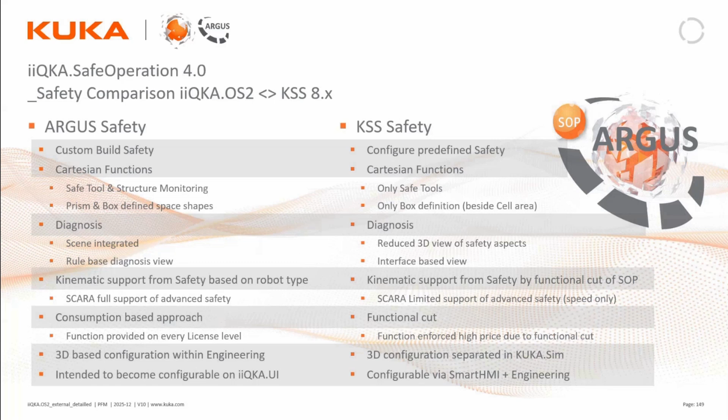For instance, a cell safety zone, your fencing, costs 10 points. Cartesian spaces cost 3 points each, and safe tools are 2 points per tool. This allows you to build a safety configuration that matches your exact requirements. While this may seem complex at first, iiQWorks simplifies the process completely. It automatically calculates and manages point allocation for you.

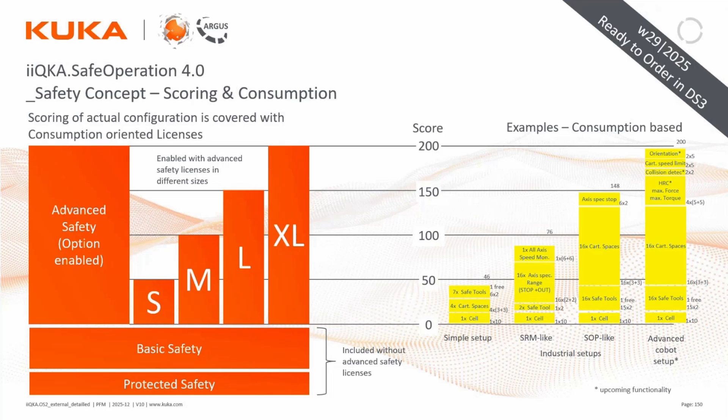As mentioned earlier, this unified safety system spans our entire robot portfolio. From compact SCARA robots to collaborative systems, all the way up to our largest Titan robots. The same tools and principles apply across all configurations, ensuring consistency and scalability for any application.

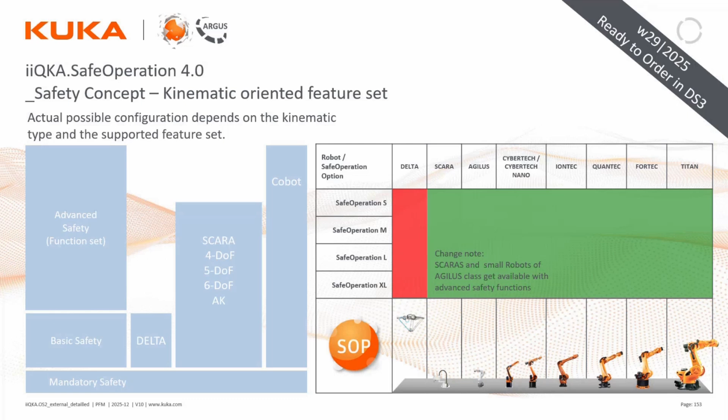The feature set continues to evolve with each iiQKA.OS2 release. We've already introduced versions 9.0, 9.1, and 9.2, with 9.3 scheduled for release this summer. Each release brings significant new functionality, along with improvements in performance, stability, and usability.

At the current level, you already have access to most functionalities familiar from SafeOperation. This includes Cartesian workspaces, cell boundary prisms, velocity limits, and operation monitoring. Future releases will further expand capabilities, particularly in collaborative robotics.

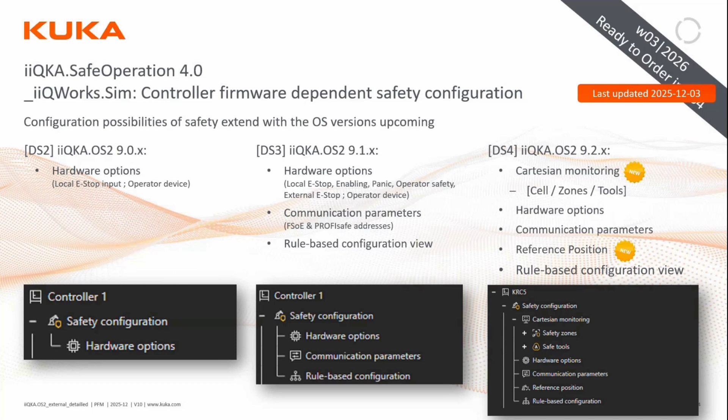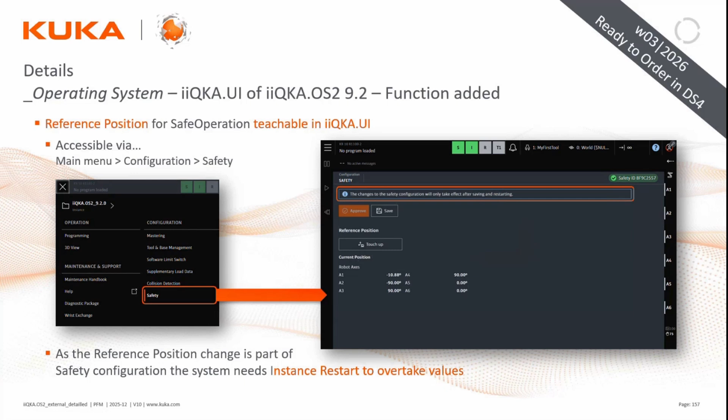Let's look at some of the new capabilities in iiQWorks.Sim. This example shows how to configure a cell wall. Previously, in SafeOperation, this required manually entering coordinates, which could be time-consuming and error-prone. Now, you can define safety zones graphically using drag and drop. You still have the option to enter coordinates manually, but most users prefer the visual approach.

Another major improvement is geometry flexibility. Previously, only convex polygons were supported. Now, concave shapes are fully supported, so you can define more complex layouts, like L-shaped areas, directly. This eliminates the need for workarounds using multiple Cartesian boxes.

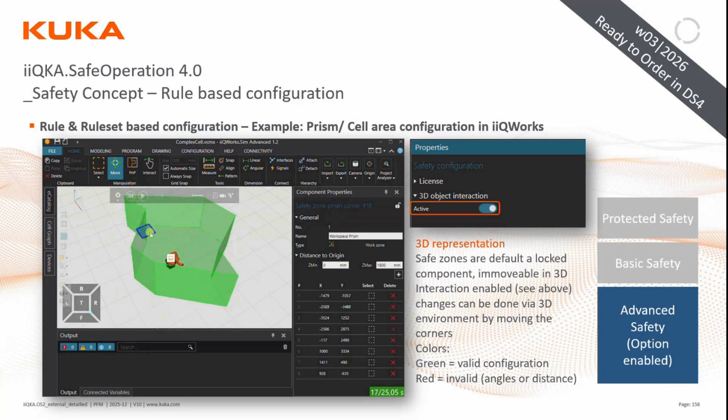Safety configuration is now fully rule-based. In SafeOperation, configurations were relatively predefined. With Argus, you can combine multiple elements into flexible safety rules. For example, you can configure logical relationships, like AND conditions, where multiple criteria must be satisfied.

Common elements include cell area or fence zones, work zones or protected zones, and velocity monitoring. And in future releases, you'll see expanded features such as orientation monitoring and advanced HRC functions like force limiting.

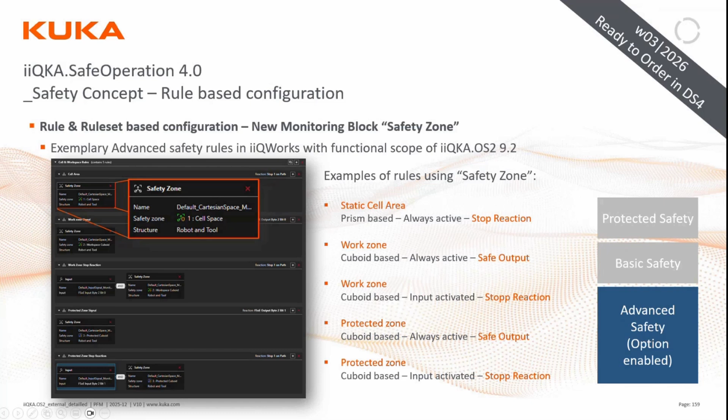As you build your safety configuration, the Project Analyzer assists you in real time. It automatically determines the appropriate license size: small, medium, large, or extra large. It also tracks your point usage as you add safety elements, ensuring full transparency.

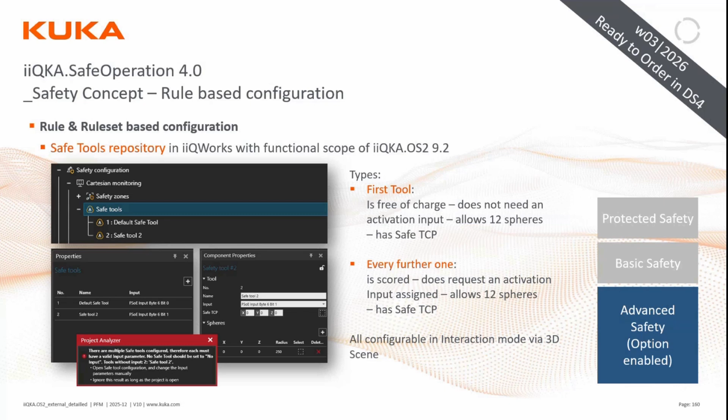For end effector protection, Argus continues to use a sphere-based modeling approach. However, configuration is now fully graphical within the Sim environment. You can easily add, position, and adjust spheres to accurately define your tool's protected volume. This allows for more precise and efficient safety modeling.

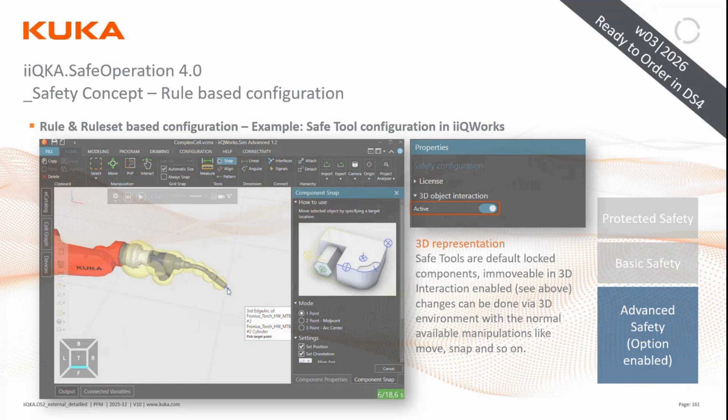There are also significant increases in system limits. Cell area prisms can now have up to 20 points, non-convex shapes are supported, up to 16 Cartesian boxes are available, and up to 50 safe tools can be defined. Each tool can include up to 12 spheres, enabling highly detailed protection of complex end effectors.

Another important enhancement is full arm monitoring. The system now also monitors the robot's rear kinematics, so areas like the elbow are protected as well.

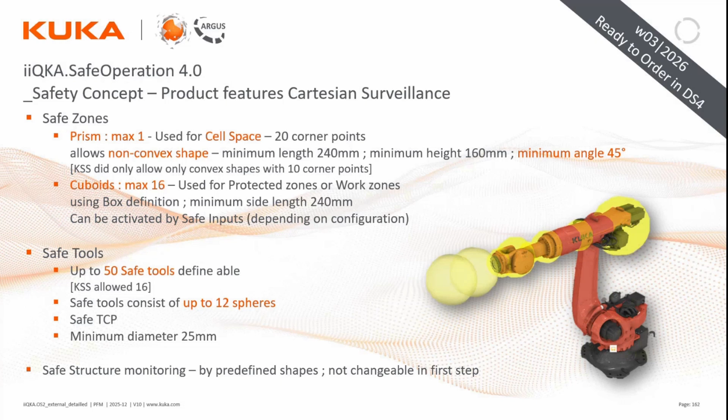Safety rules can be configured in detail for each application. For every rule, you can define the stop behavior. A key enhancement is axis-specific safe operational stops. This is particularly useful for positioners or applications where certain robot axes are allowed to continue moving under safe conditions.

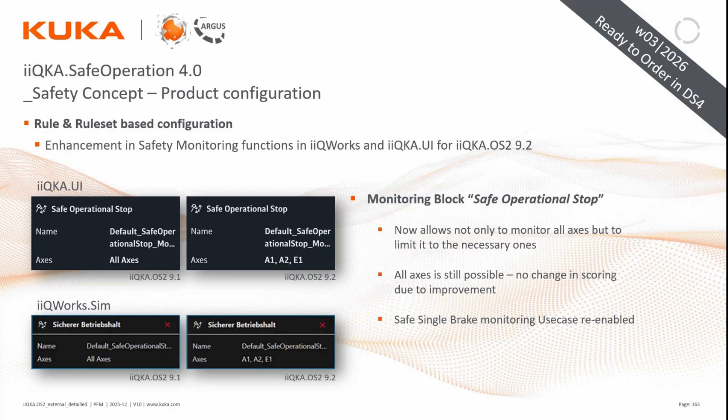Now let's move into a live demonstration. As shown earlier, most safety configuration is accessed through the devices area. You'll find a dedicated section in the project tree for safety configuration. At the top level, one important setting is 3D object interaction. Before configuring safety, you'll want to enable this option.

Next, navigate to Safety Zones. This opens the Properties panel on the right, where you can define different safety elements: protected zones, working zones, and the main cell wall prism.

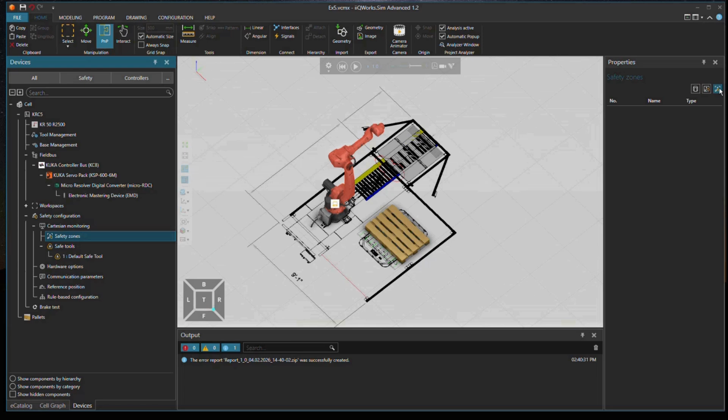Selecting the cell wall adds a default shape with 4 points. You can add additional points as needed, but note that new points are appended at the end. So it's best to plan your geometry ahead of time.

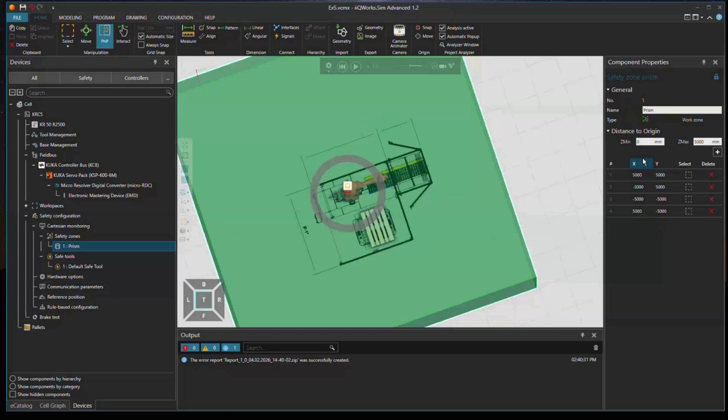In the 2D layout, you can see the dark line representing the cell wall. It has 6 corners. Just for clarity, I will point them out: 1, 2, 3, 4, 5, 6. So I'll go ahead and add those additional points right away.

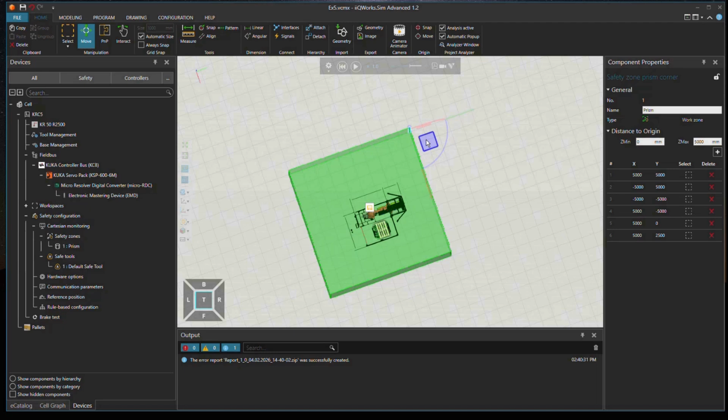Now I'll select the area and switch to Move mode for better visibility. This allows me to define and position each point interactively. I'll place the first point along the fence line. Then I move to the second point and adjust it directly on the layout. And now the third point. If you've used SafeOperation before, you'll immediately notice how much easier this is compared to manual coordinate entry.

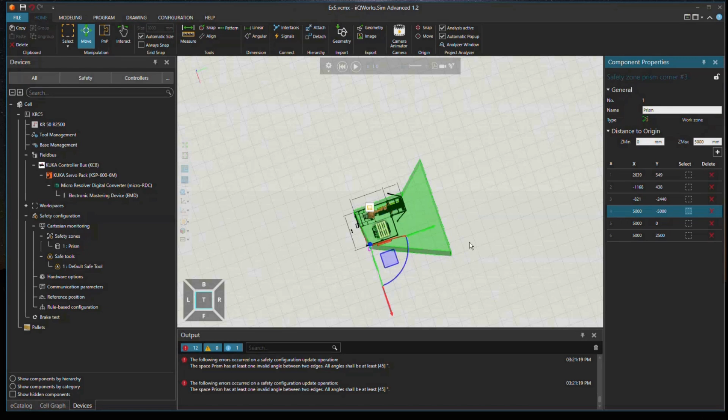Here, the zone turns red, indicating an invalid geometry due to this elongated section. Once I adjust the final point, the zone becomes valid again. This makes it very intuitive to align safety areas with your actual layout. It's a significant time saver during setup.

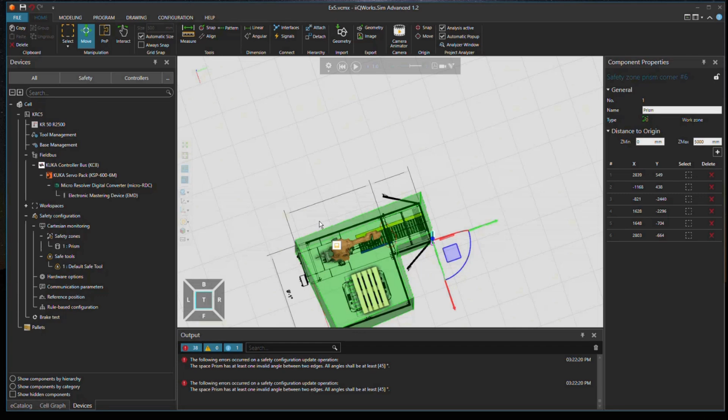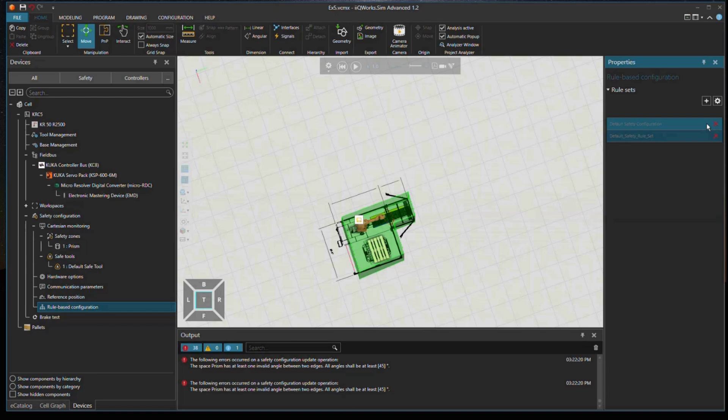You can also configure hardware interfaces, such as fieldbus settings, directly in this section. Most of your work will be in the rule-based configuration area. There is a default safety configuration, but you can create custom rules as needed. Access the rule editor via the gear icon. From there, you can define additional rule sets.

Here, I've added a rule set. Now I can add elements, such as an enabling input and velocity limitation. This is where you combine the exact pieces required for your application. So far, we haven't used any elements requiring points. Let's add a protected zone.

As soon as I select a safety zone, the project analyzer is triggered. It informs me that a safety license is required. So I'll select the small license. Now you'll see in the upper right corner: license type small, with 50 available points. Adding the safety zone uses 10 points. As I continue adding elements, the system automatically tracks point usage. If I exceed the available points, I can simply upgrade to a higher license tier.

And that concludes this introduction to Argus Safety, the new safety system within iiQKA.OS2.